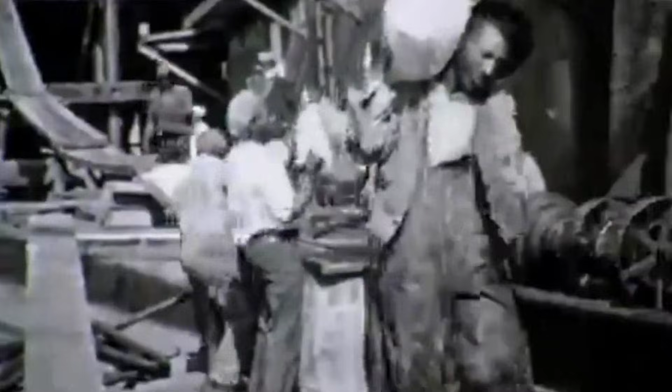The wheat sat in ship holds, waiting. Stevedores worked around the clock, their backs bent under sacks weighing 120 pounds, their muscles straining against block and tackle systems that had not changed in centuries. Unloading a single vessel took a week or more. Teams descended into dark holds, shoveling grain into sacks, hoisting them by rope and pulley to the deck, then carrying them across gangplanks to waiting canal boats. Every bushel passed through human hands at least twice. Every transfer cost time, labor, and money.

The economic threat was existential. The canal had made Buffalo the gateway between the Great Lakes and the eastern seaboard. But the port was drowning in its own success. The canal had made floating grain cheap and efficient. But if it cost more to move grain across a wharf than it did to float it 300 miles, the entire system collapsed. This was the fundamental conflict, biology versus physics.

The Midwest could produce grain faster than the human back could lift it. Mechanical reapers were multiplying harvest yields. Better planting techniques were increasing production. The land was giving up more grain every season.

Here is the math that kept merchants up at night. A strong stevedore crew could move perhaps 50 bushels per hour if they worked without rest. To handle 2 million bushels in a shipping season meant crews working every single day, dawn to dusk, for months. The bottleneck was not in the canal. It was not in the ships. It was in the 20 feet of space between the ship's hold and the dock.

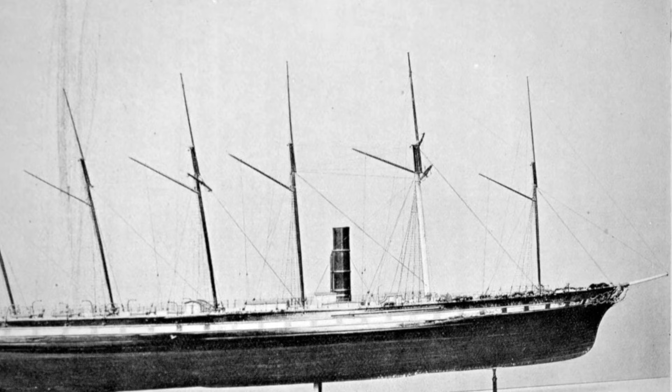The ships that plied the Great Lakes had grown larger and more efficient every year. Shipbuilders were designing vessels specifically for the grain trade. Hulls were optimized for bulk cargo. Rigging was simplified for faster loading. Maritime technology was advancing rapidly.

The farmers in Ohio and Indiana were adopting mechanical reapers that multiplied their harvest capacity. Cyrus McCormick's reaper was spreading across the Midwest. What once took a dozen men with scythes now took 2 men with a machine. The agricultural revolution was happening in real time. But at the waterfront, nothing had changed since ancient Rome. The stevedore's tools were prehistoric.

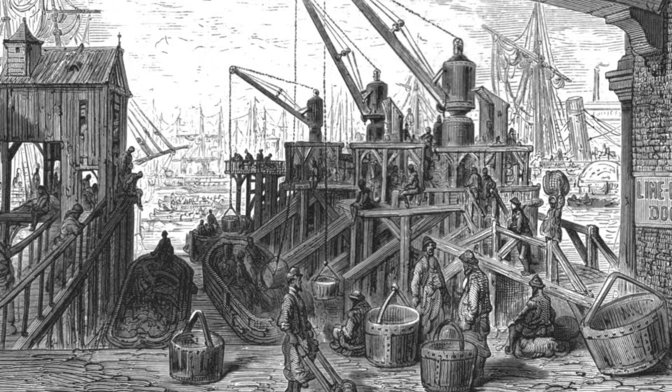A wooden shovel, a rope, a pulley. The techniques were medieval: dig into the pile, fill the sack, tie it off, hoist it up, carry it across, dump it, return, repeat.

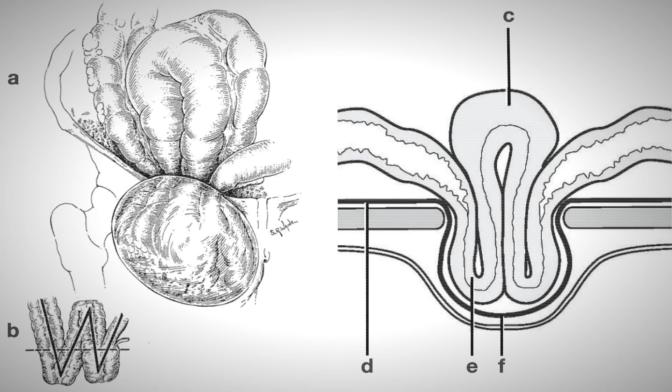The work destroyed bodies. Men in their 30s had the backs of men in their 60s. Hernias were common, crushed fingers were routine. Falls from gangplanks were frequent enough that everyone knew someone who had drowned in the harbor or been crippled by a tumble onto the dock.

Medical care was primitive. The workers accepted the injuries as the cost of employment. The profession was a trap. It paid better than factory work because it had to—no one would do it otherwise.

But the work was seasonal, dependent on the shipping window. When the lakes froze, the stevedores had no income. When the ice broke in spring, they returned to the same brutal cycle.

Some men saved enough to survive the winter. Most went into debt, paying it off during the shipping season, then going into debt again when winter came.

This was the world that business depended on, an entire regional economy built on a foundation of human suffering. Everyone accepted it because everyone had always accepted it. This was how grain moved, how it had always moved: muscle and rope and time. The methods were ancient, proven, and immutable.

The established interest actively resisted change. The stevedore gangs were organized, powerful, and deeply suspicious of anything that threatened their livelihood. They had political connections. They could shut down a dock with a work stoppage. They made it clear that any attempt to replace them would face fierce resistance.

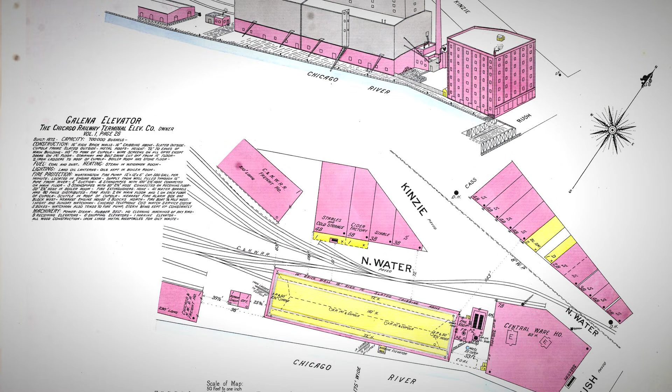The warehouse owners had invested in facilities designed for sack storage. Their buildings had loading docks at specific heights. Their interior spaces were configured for stacked sacks. Their accounting systems tracked inventory by sacks. Changing the fundamental unit of storage would mean rebuilding everything.

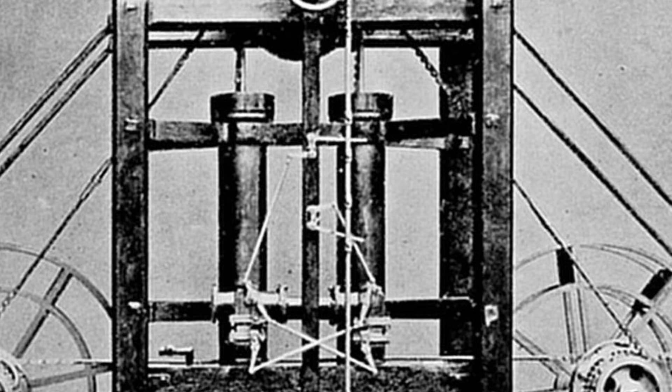The insurance companies had policies written around manual handling. They understood the risks of human labor and knew how to price those risks. A new technology would introduce unknown variables. Unknown variables meant unknown risks, and unknown risks meant higher premiums until the data came in.

The entire commercial infrastructure of Buffalo assumed that grain would always move the old way. Changing that would require overturning decades of accumulated practice. The inertia was enormous. This was not just a technological problem—it was a political and economic fortress built to resist innovation.

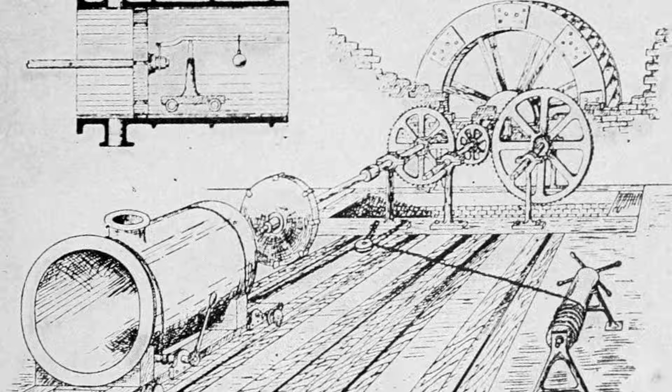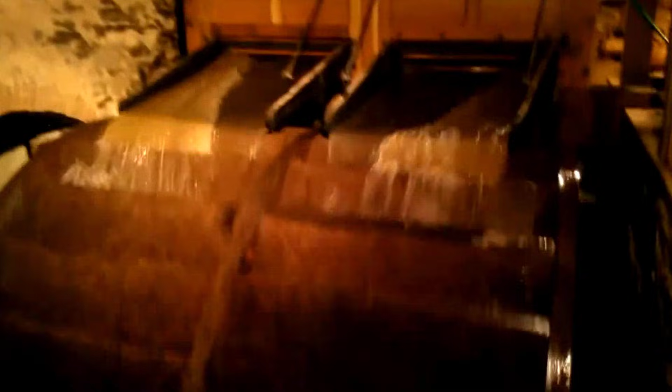The dormant solution: the solution had been sitting in a dusty patent archive for 60 years. Newport, Delaware, in the 1780s. Oliver Evans stood in his flour mill, watching water turn a wheel, watching that wheel turn gears, then watching those gears grind wheat into flour.

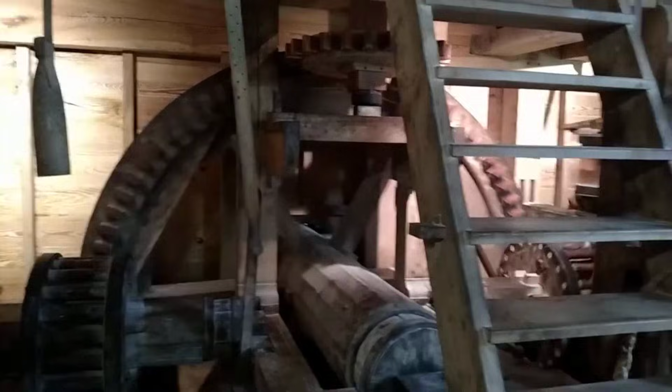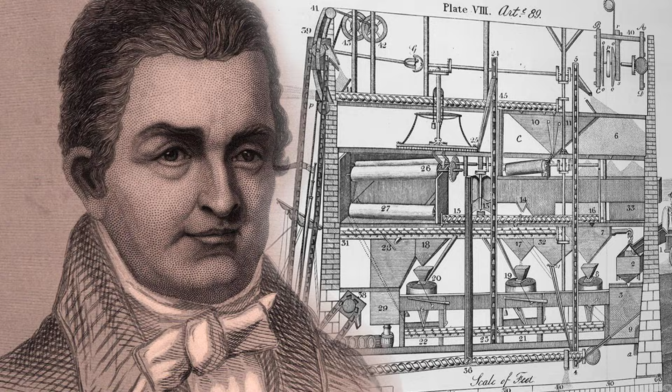The process worked, but it required constant human intervention—workers hauling sacks upstairs, dumping grain into hoppers, shoveling flour from one station to the next. Evans saw inefficiency everywhere. He saw men doing what machines could do. He saw muscles where mechanics should be.

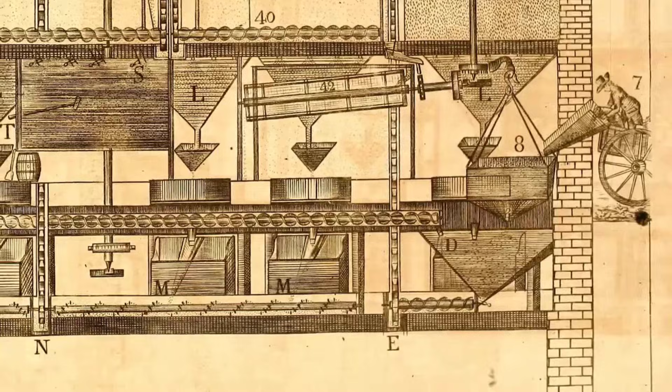Evans saw the mill as a single organism, a continuous system where gravity and mechanical advantage could replace muscle entirely. He began sketching designs, testing mechanisms. He failed, he learned, he tried again. The process took years, but Evans was patient—he understood that the right solution would be worth the effort.

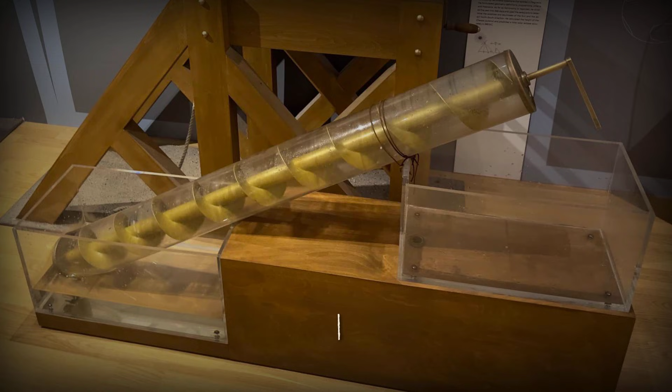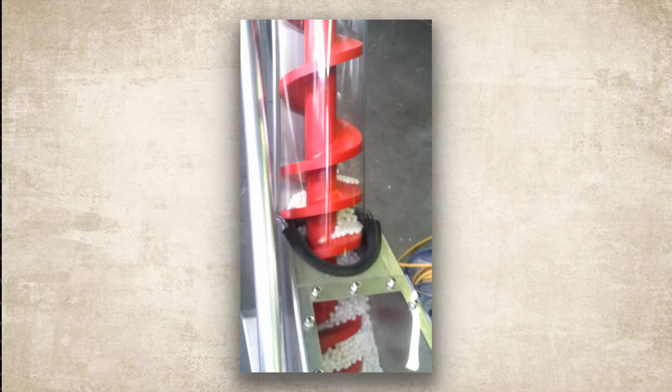The Archimedes screw had lifted water for 2,000 years—a simple helical blade rotating inside a tube pushed liquid upward with each turn. Evans adapted the principle for something nobody had tried before: dry goods. His screw conveyor pushed grain horizontally through an enclosed trough. The rotating helix acted like a screw thread, pushing the grain forward. No shoveling, no carrying, just continuous motion. The grain entered one end and emerged from the other, moved entirely by mechanical force.

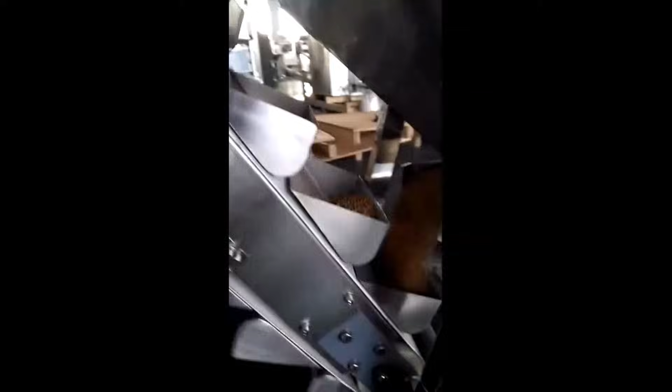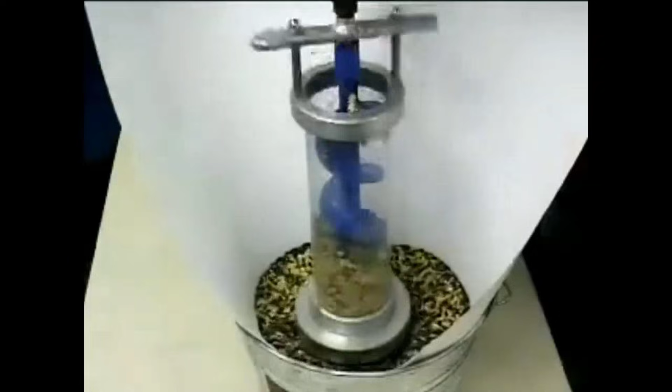For vertical movement, he invented the bucket elevator. An endless belt fitted with small cups scooped grain from the bottom, carried it upward, then dumped it at the top by centrifugal force. The physics were elegant: as the buckets rose and passed over the top pulley, the rotation caused the grain to fly outward, dumping into a receiving chute. The buckets descended empty, rose full, and discharged automatically. The system ran as long as the water wheel turned.

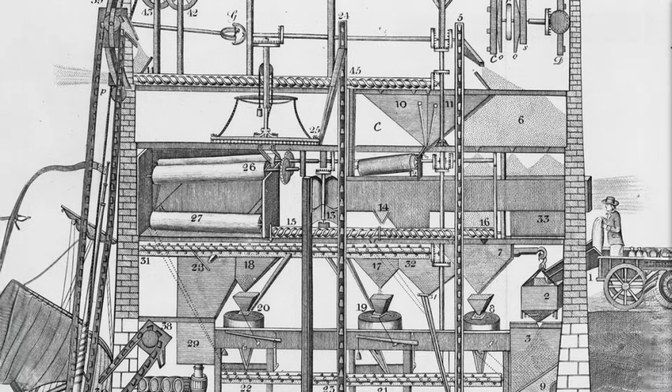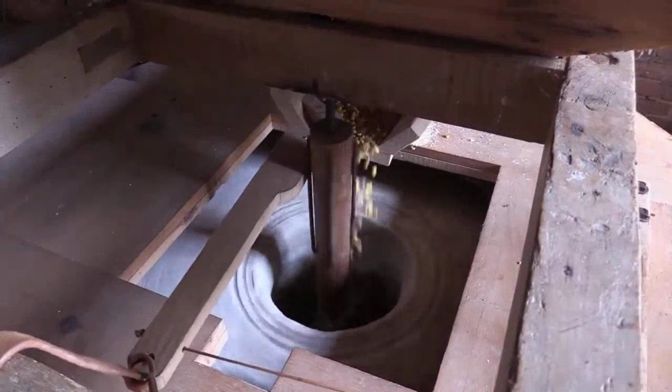Evans connected these mechanisms into a production line. Grain entered at ground level, moved horizontally via screw conveyor to the base of a bucket elevator, rose to the upper floor, traveled horizontally again to the millstones, then descended through chutes to the packing station. The entire process required human labor only to start the machinery and collect the finished flour. Everything else happened automatically. The economics were stunning: Evans reduced milling costs by 50%.

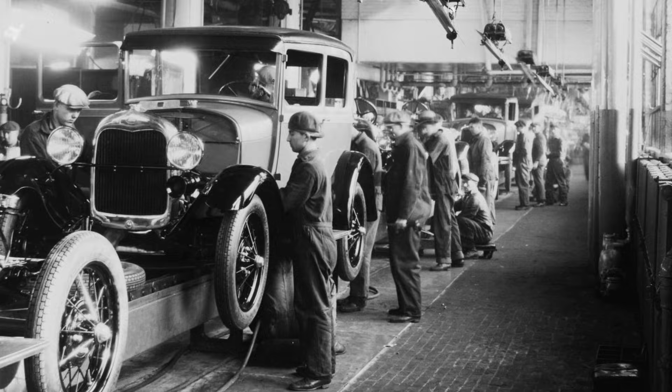A mill that once required a dozen workers could operate with 2 or 3. Production speeds doubled, then tripled. The quality improved because the process was consistent. Human error was eliminated. The automated mill represented the first true assembly line in American industry, decades before Henry Ford applied the same principles to automobiles.

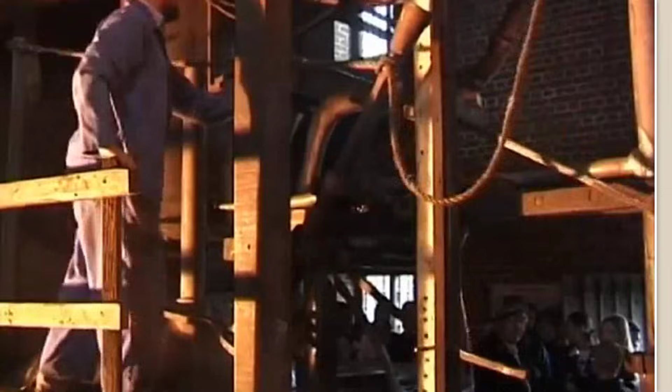But the innovation remained dormant. Evans built his mills in the 1780s, but the supporting infrastructure did not exist. Steam power was experimental, expensive, and unreliable. Most mills still relied on water wheels. The flour mills of that era served local markets that did not need to process millions of bushels. A village mill ground enough flour for the surrounding farms. The scale that would justify Evans's system had not arrived yet.

His patents expired. His designs gathered dust in technical journals. A few millers adopted his methods, but most stuck with tradition. Evans spent his later years frustrated, watching his innovations ignored by an industry that didn't understand what he had given them. He died in 1819, never seeing his system transform American commerce.

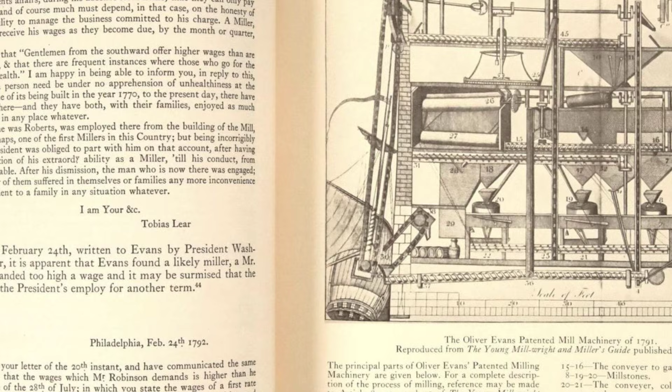He had built the blueprint for the kinetic revolution, but it sat waiting for a problem big enough to demand it. The technology existed. The principles were proven, but the crisis that would force adoption had not arrived yet. That problem arrived 23 years later, in Buffalo Harbor, where 2 million bushels of wheat were rotting in ship holds, while merchants watched their fortunes disappear.

The unlikely hero. Joseph Dart was not an engineer. He was not an inventor. He was a merchant, a businessman who watched his profits evaporate in Buffalo's gridlocked harbor. He understood ledgers, not machinery. He knew markets, not mechanics. But he had something more valuable than technical expertise.

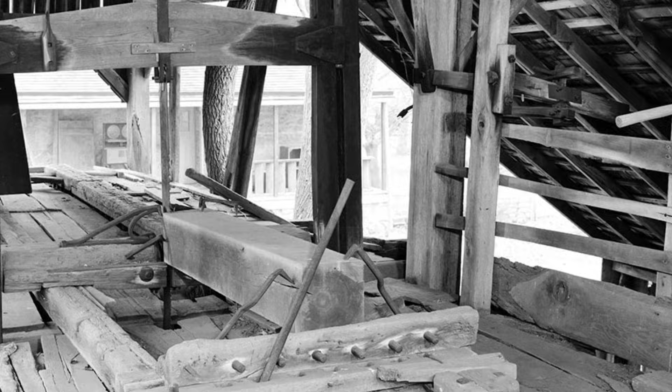He had desperation. In 1842, he owned grain. He owned ships. He owned warehouses. But none of it mattered if the wheat could not move from hold to dock to canal boat before it rotted. Every day his ships sat waiting for unloading was a day of lost capital. Every bushel that spoiled was money thrown into the harbor. The interest on his loans kept accruing. The storage costs kept mounting. The whole operation was bleeding cash.

Dart understood the economics better than anyone. He had calculated exactly how much the bottleneck was costing him. The numbers were staggering. He was losing more money to delays than he was making on successful shipments. The business model was broken. If the situation did not change, he would be bankrupt within 2 years.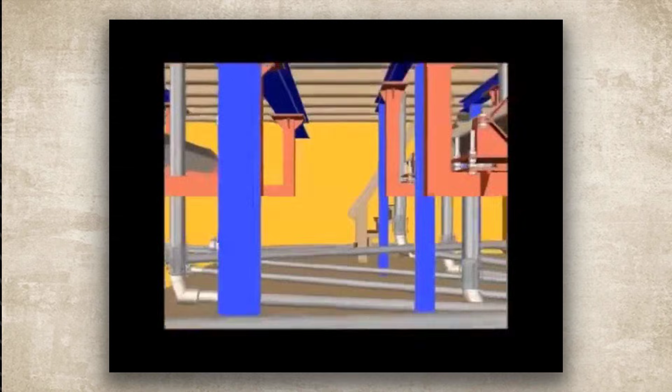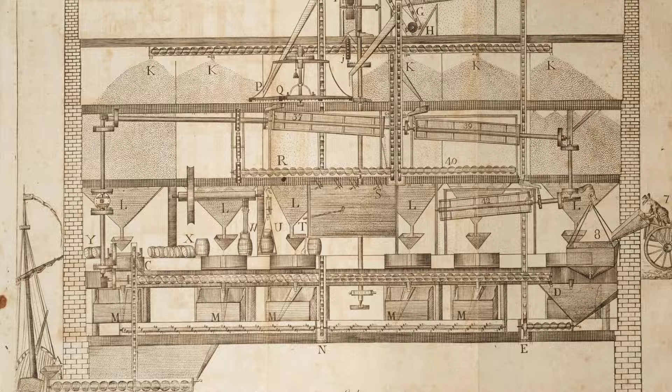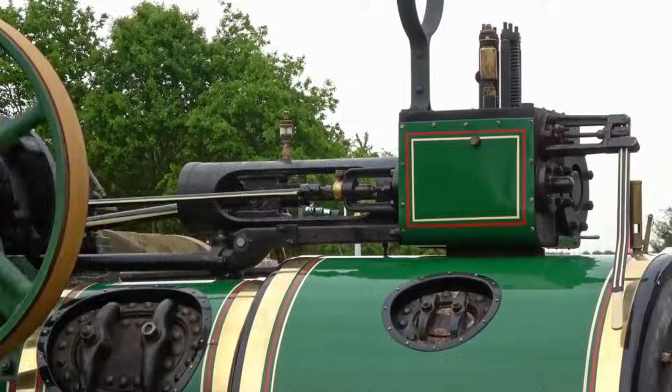But Dart had read about Oliver Evans. Somewhere in his research into milling operations, he had come across descriptions of the automated flour mill. He understood the principle: buckets on a belt, powered by steam, lifting grain vertically without human muscle. The concept was elegant. The challenge was scale. Evans had built for flour mills processing hundreds of bushels per day. Buffalo needed to move thousands of bushels per hour. The bucket elevator that worked in a 3-story mill would need to be 10 times larger, 10 times stronger, driven by steam power instead of water wheels.

The engineering would be complex, the construction would be expensive, but the alternative was bankruptcy. Dart needed someone who could scale the concept to industrial dimensions. Robert Dunbar was that engineer. Dunbar had experience with steam engines. He understood power transmission. He knew how to calculate the stresses on mechanical systems. Most importantly, he understood that the principles Evans had proven in a flour mill would work just as well in a grain terminal. The physics were the same, only the scale was different.

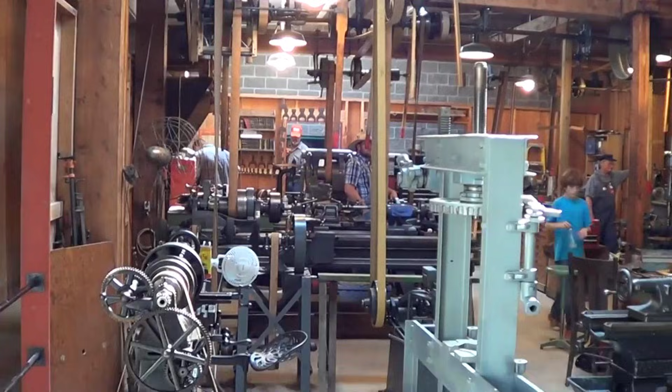Together, they spent the winter of 1842 to 1843 designing something America had never seen: a mechanical grain elevator, powered by steam, capable of lifting thousands of bushels per hour from ship holds to elevated storage bins.

The waterfront laughed when word spread about Dart's plan. A steam bucket contraption, that's what they called it. Dart's folly. The rich merchant trying to replace men with a machine. The established stevedore companies dismissed it as fantasy. The warehouse owners called it impractical. The competing merchants saw it as desperation. Dart was hemorrhaging money, they said, and now he was going to waste even more on a mechanical pipe dream.

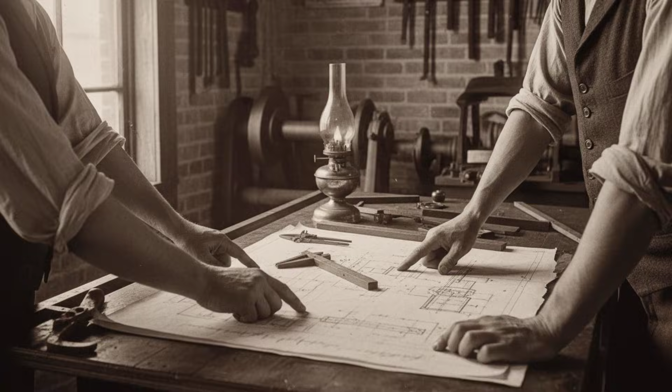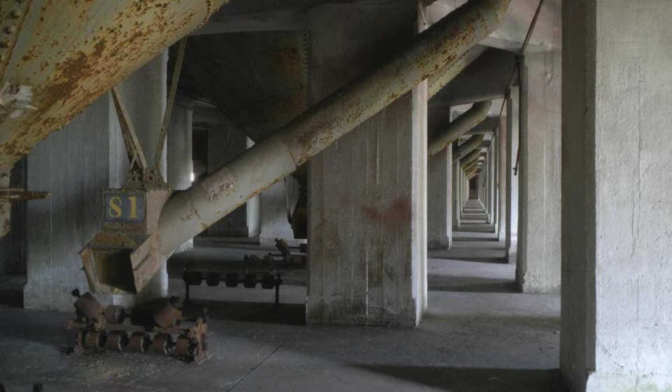Their objections seemed reasonable. Grain wasn't like flour. It came in irregular lumps, mixed with chaff and dirt and sometimes rocks. How would buckets handle that? The machinery would clog, the belts would break, the whole thing would collapse under the weight. Evans had worked with processed flour, carefully cleaned and dried. Dart wanted to lift raw grain, straight from the ship's hold, damp with lake water and contaminated with debris.

And what about the cost? Steam engines were expensive. The construction would require massive timbers, iron fittings, precision metalwork. Dart would bankrupt himself building this monument to his own arrogance.

Meanwhile, the old way kept working. Slow, yes. Expensive, yes. But reliable. The stevedores might complain about the work, but they showed up every day. They moved the grain. The system functioned.

The stevedore gang saw it as an existential threat. If DART's machine worked, they were finished. Hundreds of men would lose their livelihoods overnight. The gangs had families. They had debts. They had no other skills that could match the wages they earned on the docks.

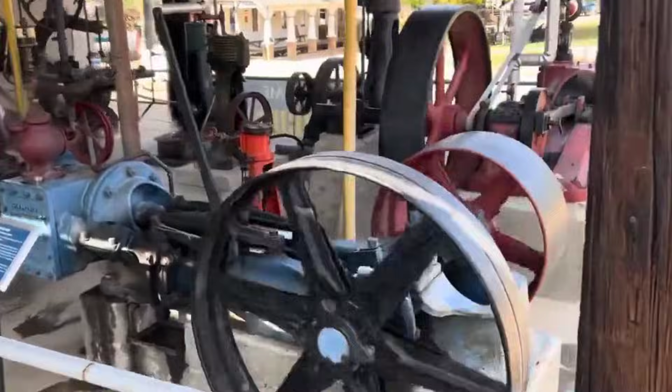The resistance was fierce and vocal. Some threatened sabotage. Others lobbied the harbor master to deny DART a building permit. They argued that the steam engine would be a fire hazard. They claimed the structure would block ship traffic.

The mockery had an edge of fear to it, because everyone understood that if DART succeeded, everything changed. The fortunes built on manual labor would evaporate. The carefully constructed political alliances would become worthless. The world they knew would end. The men who controlled Buffalo's waterfront would lose their power overnight.

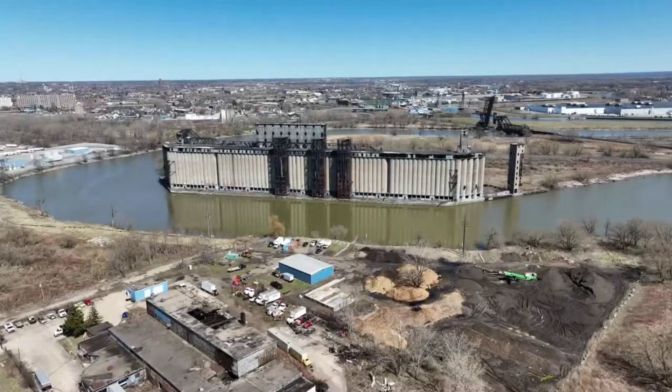So they laughed. They called it impossible. They predicted spectacular failure. They spread rumors that DART was mentally unstable, throwing good money after bad. And they waited for DART to prove them right. They expected to watch the construction fail, the machine break, and DART sink into bankruptcy. Then, things would return to normal.

But DART and Dunbar were not deterred. Through the brutal winter of 1842 to 1843, they built. The structure rose above the waterfront. It was 50 feet wide, 100 feet long, and it rose 30 feet above the dock. A wooden skeleton filled with mechanical ambition.

Inside, a steam-powered engine drove a continuous belt fitted with iron buckets. The marine leg, a movable arm that could be lowered into ship holds, extended from the building. The whole apparatus looked alien, industrial, nothing like the traditional warehouses that lined the harbor.

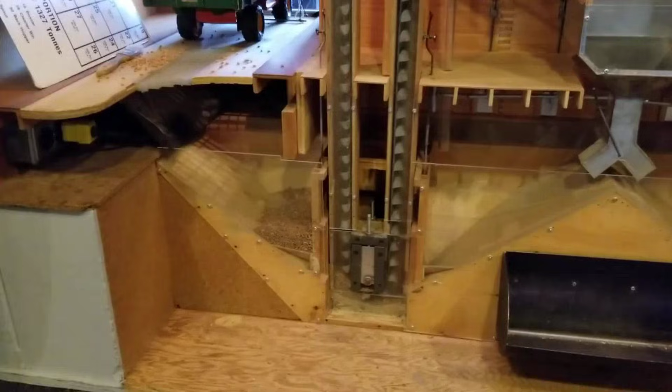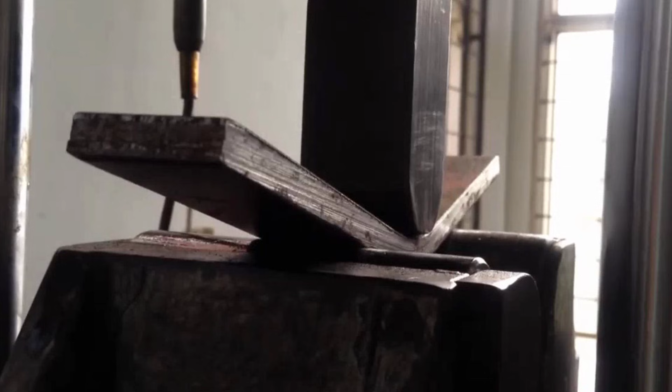The engineering challenges were immense. The buckets had to be strong enough to carry wet, heavy grain, but light enough that the belt could move them efficiently. Dunbar calculated the loads carefully. Too heavy, and the steam engine could not drive the system. Too light, and the buckets would bend under the weight of the grain. He settled on iron buckets, each one about 6 inches deep, spaced 2 feet apart on the belt.

The spacing had to be precise, close enough to move grain efficiently but far enough apart that they would not jam when they rounded the pulleys. The discharge mechanism had to dump the grain cleanly without clogging.

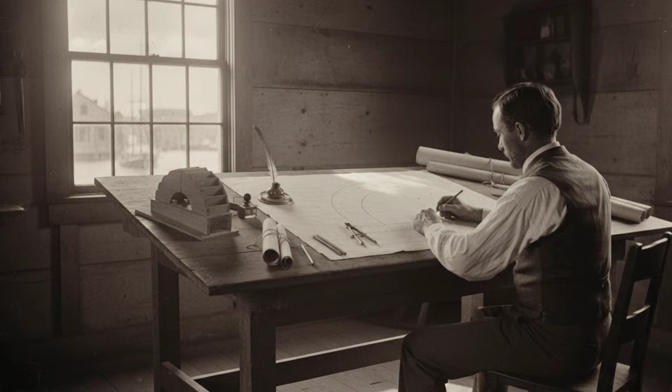Dunbar designed a curved hood at the top of the elevator. As the buckets passed over the drive pulley, the curve caused them to tip, dumping their contents into a receiving chute. The grain fell into elevated storage bins, while the empty buckets descended to scoop another load.

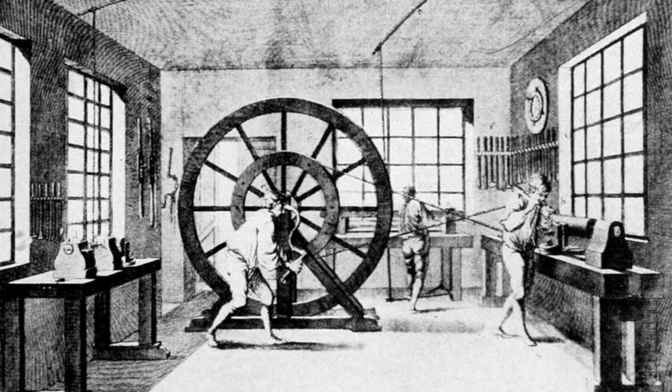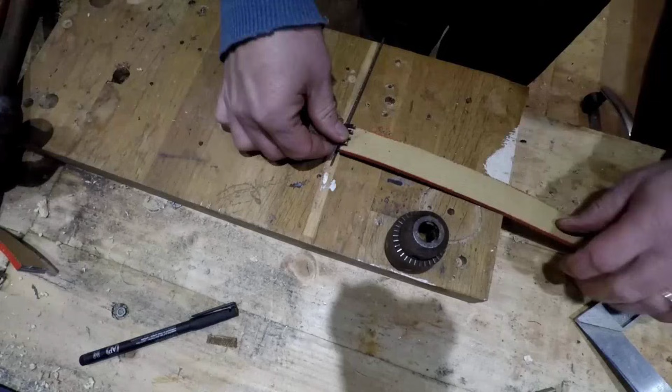The belt itself was a challenge. Leather belts would rot from constant contact with damp grain. Canvas would wear through too quickly. Dunbar used a combination of canvas reinforced with metal plates at stress points. The belt had to be flexible enough to bend around the pulleys, but strong enough to handle the weight without stretching or breaking.

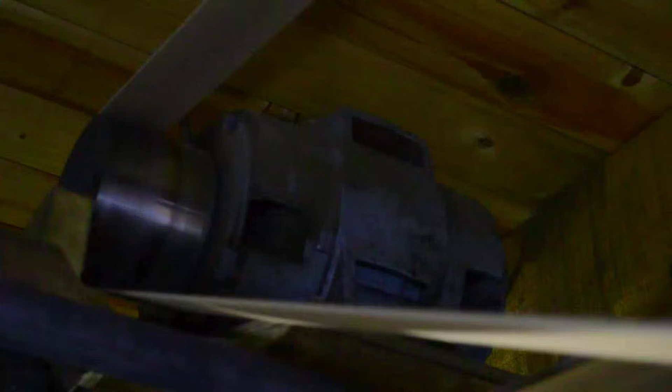The steam engine was the heart of the system. It drove the belt with consistent power, hour after hour, without fatigue. No breaks for lunch. No stopping when muscles gave out. Just relentless, mechanical motion. Dunbar connected the engine to the drive pulley through a series of gears that controlled the speed.

Too fast, and the buckets would spill grain. Too slow, and the system would not achieve the throughput Dart needed.

By May of 1843, the facility was ready. Dart had invested everything. His warehouses were mortgaged. His ships were pledged as collateral. He had borrowed from every bank that would lend to him. If this failed, he was ruined.

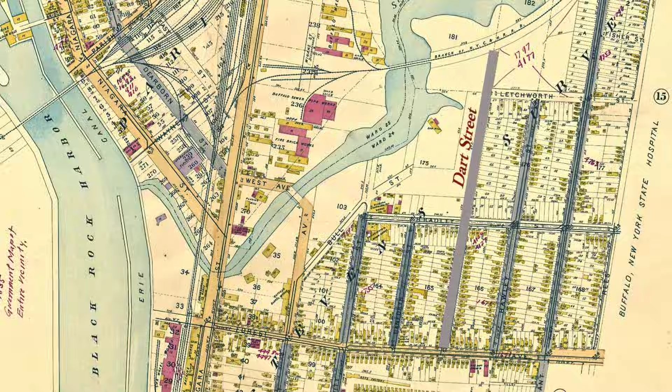His competitors would divide his assets. His family would lose everything. But if it succeeded, he would own Buffalo. The risk was total. The potential reward was absolute dominance.

The proof. June 1st, 1843. The first test run. A grain ship pulled alongside Dart's elevator. The captain, skeptical but curious, agreed to be the guinea pig. The waterfront crowded with spectators. Competing merchants stood with arms crossed, waiting to see the failure.

Stevedore gang leaders watched with barely concealed hostility. Harbor officials took notes for their reports. Everyone wanted to see Dart's folly in action.

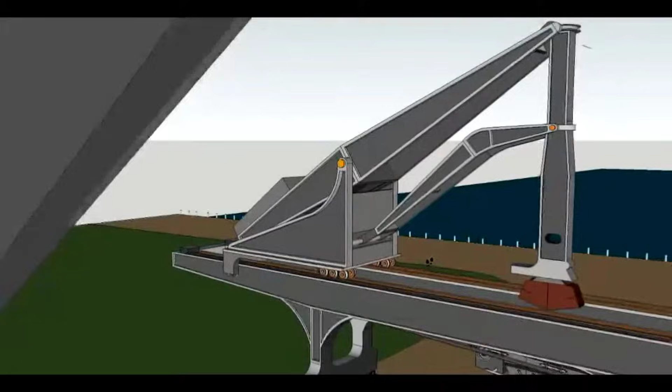The marine leg descended into the hold. The mechanism was crude, but functional. Workers guided it into position. The steam engine fired. The belt began to move. The buckets dipped into the grain, scooped up their load, and began the climb.

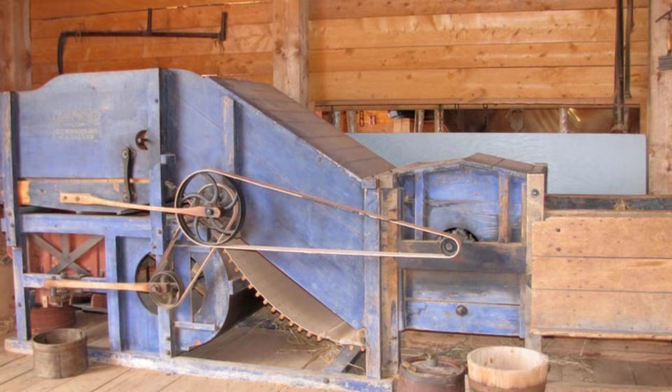The first few minutes were tense. Would the belt hold? Would the buckets clog? Would the discharge mechanism work? The grain rose 30 feet. The buckets tipped at the top.

The grain fell into the receiving bin. The buckets descended empty, then scooped again. The cycle continued at 600 bushels per hour. The watching crowd went silent.

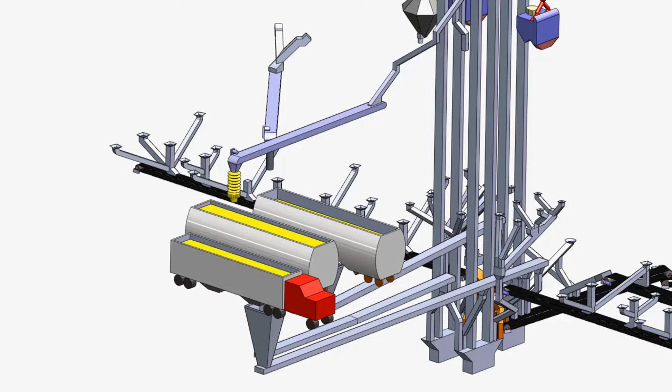That number meant everything. The fastest stevedore crew in Buffalo could move perhaps 60 bushels per hour working without rest. Dart's machine was 10 times faster. It never tired, never slowed, and never demanded wages, breaks, or water.

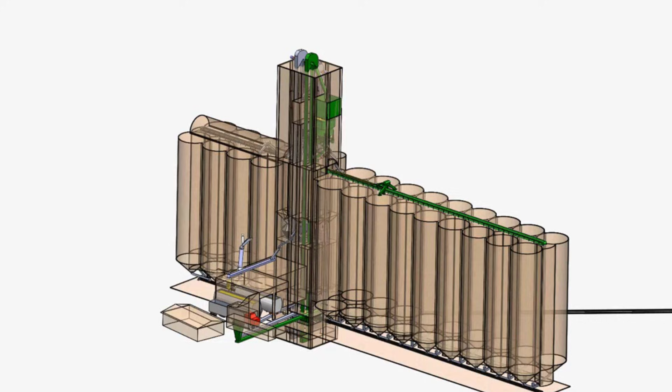It just ran, bucket after bucket, hour after hour. What had taken a crew a week now took hours. A ship that would have waited days for an unloading berth could discharge its cargo and return to the lakes the same day. The captain calculated the savings immediately: less time in port meant more trips per season, and more trips meant more profit. He would use Dart's elevator every time.

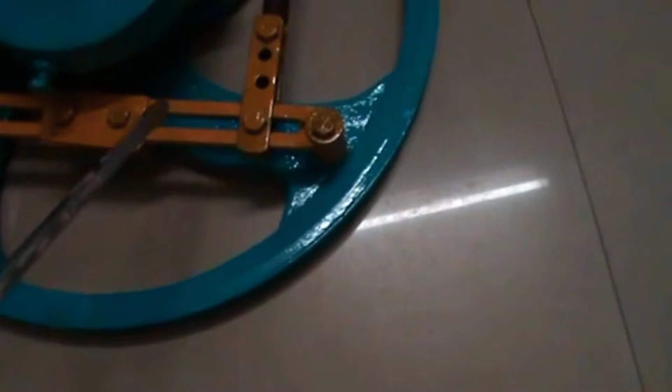By the end of the first year, the system was handling 2,000 bushels per hour. The improvements came from small adjustments. Dunbar redesigned the buckets with a slight lip that held more grain, optimized the belt speed to match the discharge rate, and added a second marine leg so two ships could unload simultaneously.

The fundamental principle was proven beyond any doubt. The merchants who had mocked Dart stopped laughing and started calculating. If Dart could turn ships around in hours while they took days, he would capture every shipment. Captains would prefer his facility because it meant less waiting, less spoilage, faster payment.

Word was already spreading across the Great Lakes: the ships would come to Dart first, and the old warehouses would get whatever was left. Dart wouldn't just win, he would monopolize. The mathematics of competition had changed overnight. The manual system could not compete with the mechanical one. It was like watching a man race a locomotive. The outcome was never in doubt.

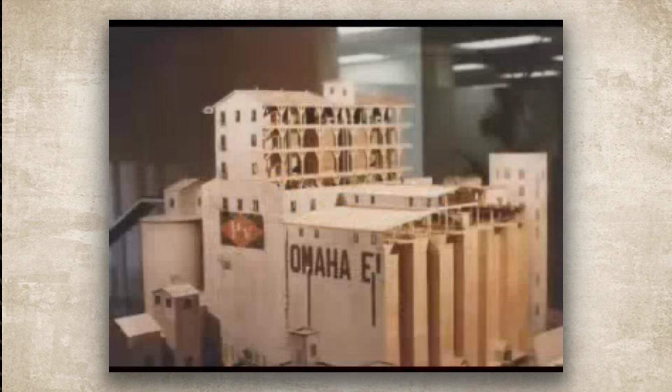The flood. The transformation was not gradual - it was catastrophic for the old order. Within two years, competing elevators rose along the waterfront. Other merchants watched Dart's success with the desperation of men watching their businesses die. They had no choice: build an elevator or lose everything.

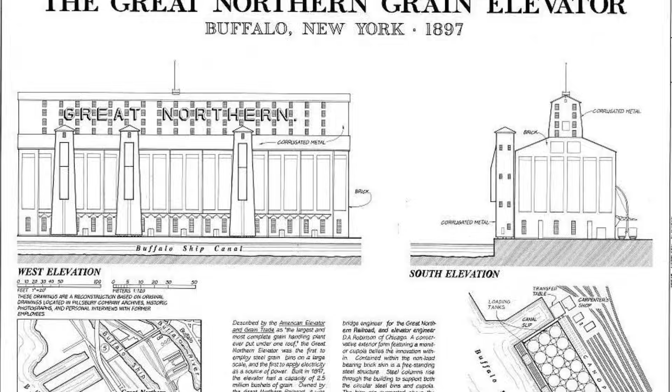The economics were brutal and simple. Dart was capturing 90% of the incoming ships, and the remaining 10% were not enough to keep a business solvent. Robert Dunbar became the most sought-after engineer in Buffalo. He designed elevator after elevator, each one learning from the last.

The second generation was more efficient than the first. He improved the marine leg mechanism, making it faster to position, and refined the bucket design, increasing capacity by 20%. The third generation was more efficient than the second, adding mechanical sorting systems that separated grain by quality as it flowed through the elevator.

The technology improved with terrifying speed. By 1860, Buffalo operated 10 major grain elevators, with combined storage capacity exceeding 1.55 million bushels. The city that had nearly drowned in grain now processed it faster than the Midwest could grow it. The bottleneck was gone - ships arrived, unloaded in hours, and departed. The harbor that had been choked with waiting vessels was now clear. The efficiency was almost shocking.

The stevedores were destroyed - not slowly, not gradually, but within a season. Gangs that had controlled the waterfront for decades found themselves obsolete. The first elevator put 100 men out of work. The second elevator put another 100 out of work. By the time the 10th elevator was operational, the profession had essentially disappeared from Buffalo.

Some men tried to adapt, becoming machine operators - the work was easier but paid less. Most simply disappeared, moving to other ports where manual labor still ruled, or leaving the docks entirely for factory work.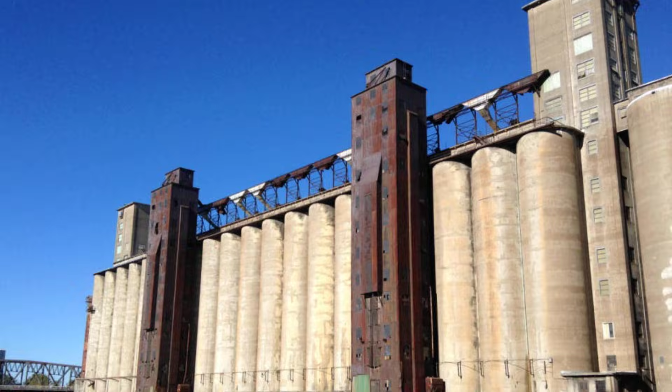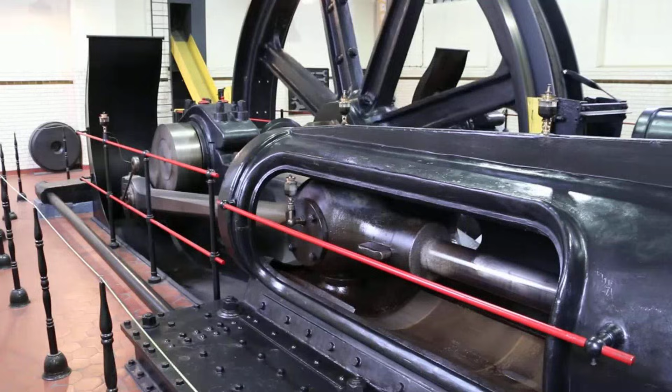The architectural impact matched the economic one. The grain elevator emerged as a new building type. These were not warehouses in any traditional sense - they were tall, functional structures defined entirely by their mechanical purpose. Vertical storage bins stacked like columns, the marine leg extended like an arm into the water, the constant hum of steam engines, the smell of grain dust in the air. These were machines you could walk inside.

The buildings dominated the skyline. They were taller than any church, more imposing than any mansion. They represented the new industrial order, where function dictated form and efficiency was the only beauty that mattered. European architects would later study Buffalo's grain elevators as examples of pure industrial design, freed from decorative tradition.

By 1865, Buffalo operated 26 grain elevators. The city had surpassed London, Odessa, and Rotterdam to become the world's largest grain port, handling over 7 million barrels of wheat and flour annually. The Erie Canal had created the opportunity, connecting the interior to the coast, but Dart's elevator made it real - the infrastructure could finally handle the volume that the canal delivered. The transformation was complete. The city that had nearly strangled on its own success was now the unchallenged grain capital of America.

The ships came from Chicago, Detroit, Milwaukee, and Cleveland, all carrying grain that would flow through mechanical elevators at speeds that would have seemed impossible just 20 years earlier. The innovation changed more than throughput numbers. It changed the nature of the commodity itself. Grain was no longer measured in sacks as discrete countable units that men carried. It was measured in volume, in bushels per hour, in the continuous flow of material through mechanical systems. The elevator did not just move grain faster. It transformed grain from a solid into a fluid, from something that sat in piles into something that streamed through pipes and chutes. This was the true revolution.

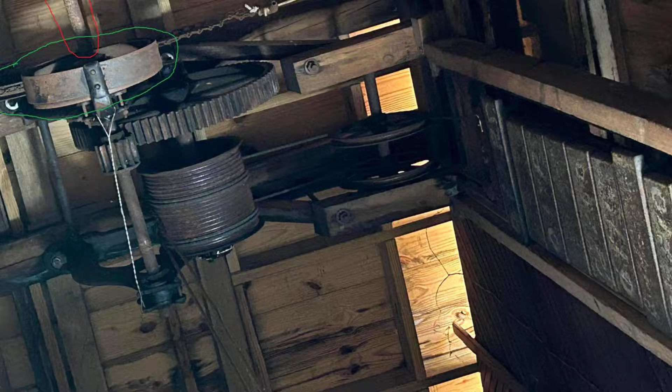This philosophical shift rippled through the entire agricultural economy. Farmers began thinking of their harvest differently. They sold grain by the bushel, but they thought of it as flow. How many bushels per hour could they deliver? Railroads designed cars for bulk flow rather than sacks. They built hoppers that could dump their entire load quickly. Markets priced grain by volume rather than weight. The entire conceptual framework of agriculture changed because of how the grain moved.

The new building type changed architecture permanently. The grain elevator's vertical bins became the model for industrial storage worldwide. Concrete silos for cement, steel tanks for oil, refrigerated towers for frozen goods, all of them descendants of Dart's wooden elevator. The principle of vertical storage with mechanical flow became universal.

Dart had solved the vertical problem. Grain could now rise from ship holds to storage bins without human intervention. This single innovation unlocked the Erie Canal's full potential. The cost savings that had been promised by the canal's builders finally materialized. Shipping grain from Chicago to New York became cheaper than anyone had imagined possible.

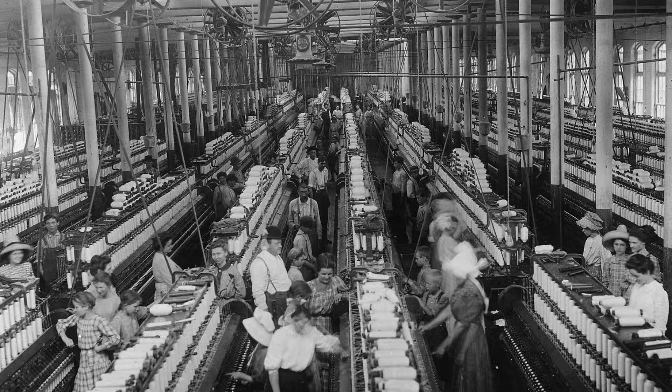The economic geography of America shifted. Buffalo became wealthy. The farmers of the Midwest gained access to Eastern markets. The cities of the East gained affordable food. The consequences cascaded through the economy. Cheaper bread meant urban populations could afford better nutrition. Better nutrition meant healthier workers. Healthier workers meant more productive factories. The Industrial Revolution in the East was fed by grain that flowed through Dart's invention.

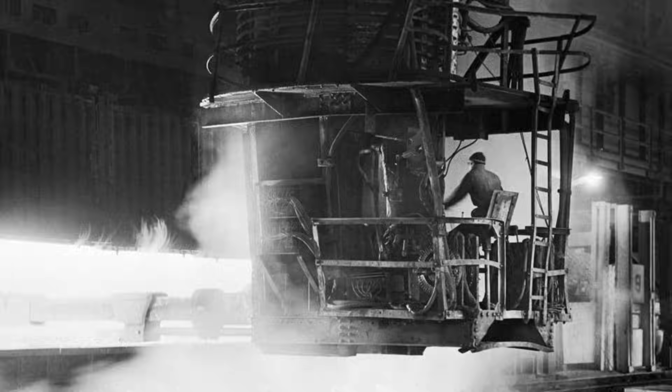You could draw a direct line from the mechanical elevator to the rise of American industrial power, but the human cost was real. The stevedore profession essentially disappeared. Thousands of men who had made their living with their backs found themselves obsolete. Some adapted. Most did not. The efficiency that fed millions displaced thousands.

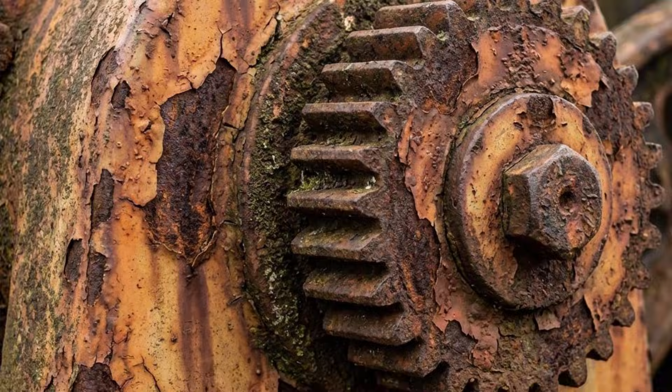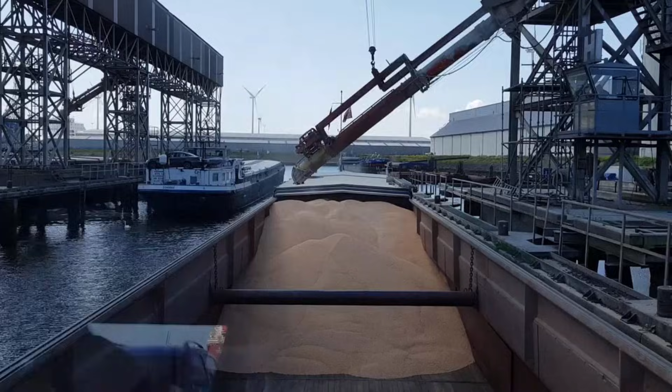This was the bargain of mechanization, repeated across every industry, in every generation. The gain in productivity came with a loss in employment. Society as a whole benefited. Individual workers suffered.

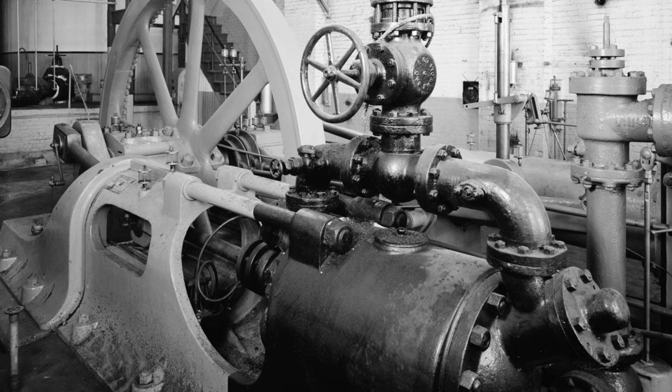Today, every grain terminal in the world traces its lineage back to the wooden structure Joseph Dart and Robert Dunbar built on the Buffalo waterfront in 1843. The technology has evolved. Steel replaced wood. Electric motors replaced steam engines. Computer systems control the flow with precision Dart could not have imagined.

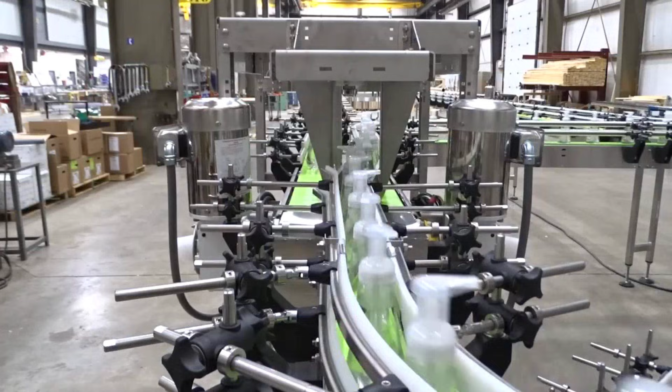Sensors monitor moisture content, temperature, and quality. Automated systems route grain to specific bins based on grade and destination. But the fundamental principle remains unchanged. Buckets on a continuous belt lift grain vertically, discharge it automatically, turning solid into liquid.

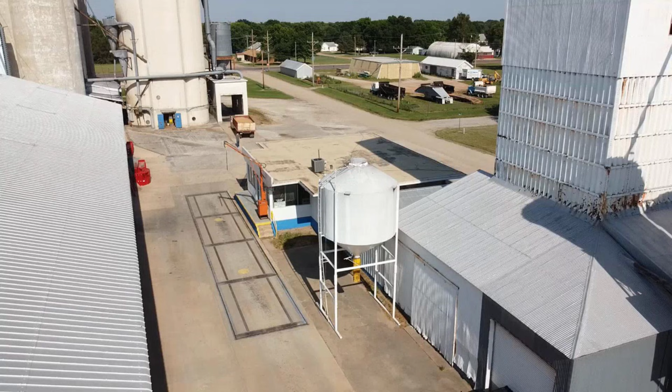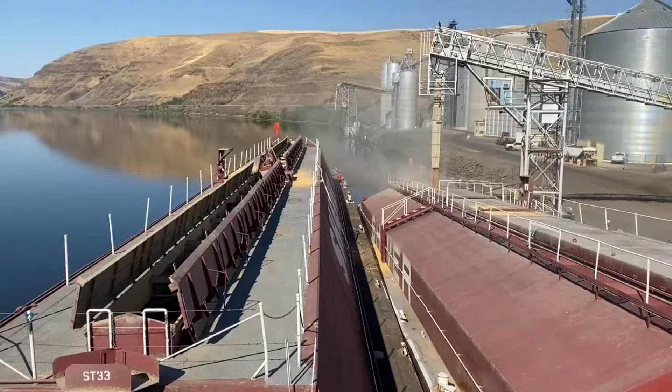The modern farmer in Kansas harvests wheat that flows through a system Dart would recognize. The combine auger leads to the grain cart. The grain cart leads to the truck. The truck leads to the elevator. The elevator leads to the barge or rail car. Every link is mechanized. Every transfer is automatic. The shovel remains in the barn, a relic of an era when human muscle was the only force available to move the harvest.

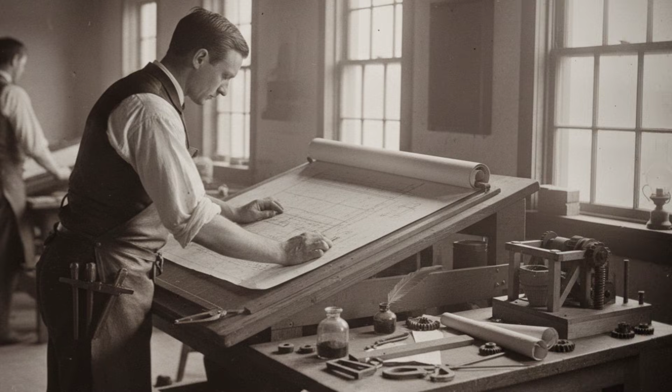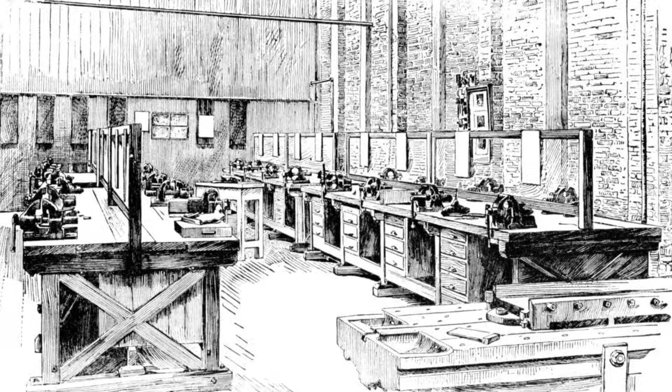Dart proved something profound. The obstacle that everyone accepted as permanent was actually just a problem waiting for someone desperate enough to solve it. He was not the smartest man in Buffalo. He was not the most technically skilled. Robert Dunbar deserves equal credit for the engineering. But Dart was the one who refused to accept that his business had to fail because human hands could not move grain fast enough. He looked at an impossible problem and decided it was merely difficult.

The competitors who laughed at his steam bucket contraption spent the rest of their careers trying to catch up. Most never did. The month after Dart's elevator went operational, the balance of power in Buffalo shifted permanently. Dart did not just gain market share, he redefined what market dominance meant. The men who adapted survived. The men who clung to the old ways disappeared.

This is the pattern that repeats throughout industrial history. The innovation that seems ridiculous becomes the standard everyone must adopt or die.